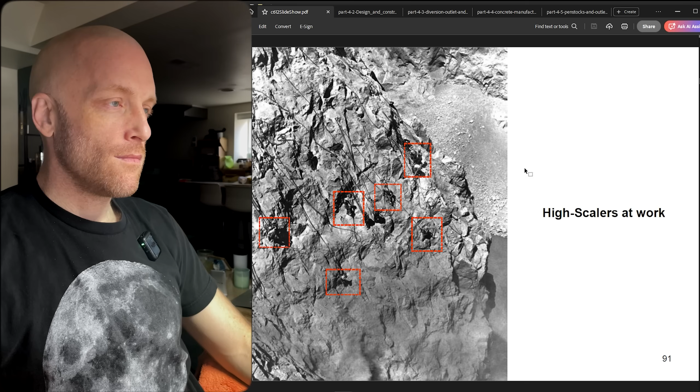Oh man, that's awesome. Look at these fellas just dangling off the side, the high scalers. The bosun's chair.

I hope that some of the enthusiasts would see that I cared about the accuracy enough to model a Mack, an early Mack truck. If I'm going to include a detail, I want to make sure that it has things that will please people that know.

It's not good enough to fool a bunch of people online who don't know anything, that's easy. If you can convince the experts who do know, then you've done your job. I love that feeling of having people who know something be delighted to say, oh man, he included this detail. Yeah, that feels awesome.

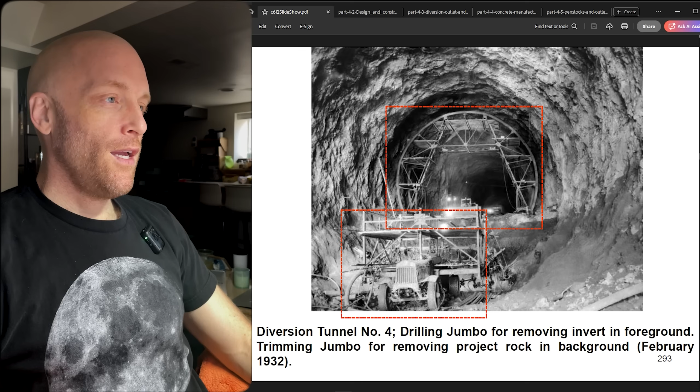Didn't show this one, but this little arch - you can't see it in this photo, but there's an arch behind here. That's from removing the invert section, the construction road in the tunnel. And this jumbo here is just for trimming the walls to make them round, so they would stand up there and jackhammer and whatnot. The invert forms.

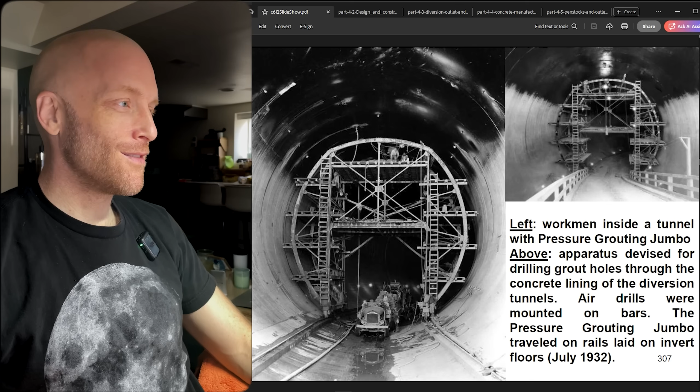This I did not show - the pressure grouting jumbo. I showed the grouting right in the tunnel, but not the pressure grouting rig. Just as involved as the other rigs. There you go, the pressure grouting rig again.

And they made the penstocks and all the other tunnels in similar ways. They're just as involved - look at all this gear and equipment and all the people in here. So much detail, but yeah, they followed a similar process. So everything looks like that. Just insane - you can't even imagine everything that's happening in that moment.

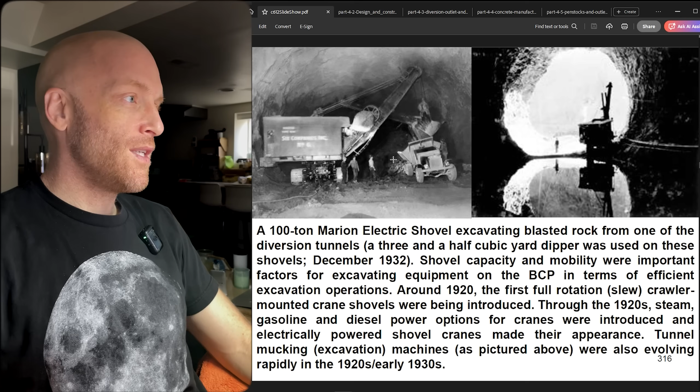Diversion tunnel openings. There's the photo inspiration, the 100-ton shovel and the truck. They could barely fit it in the tunnel, so they had to really think about that. And trucks going by each other was a problem, so it was a tight fit for all this equipment in the tunnels.

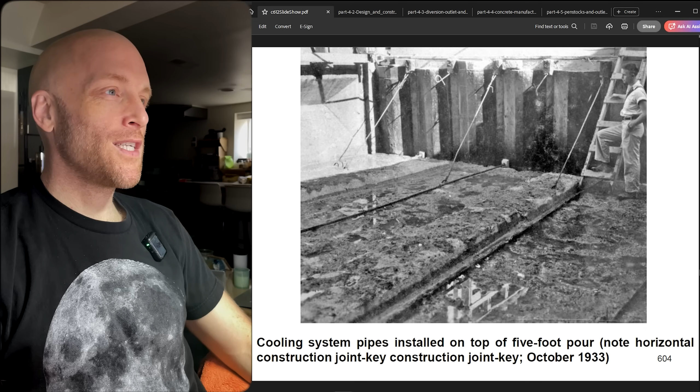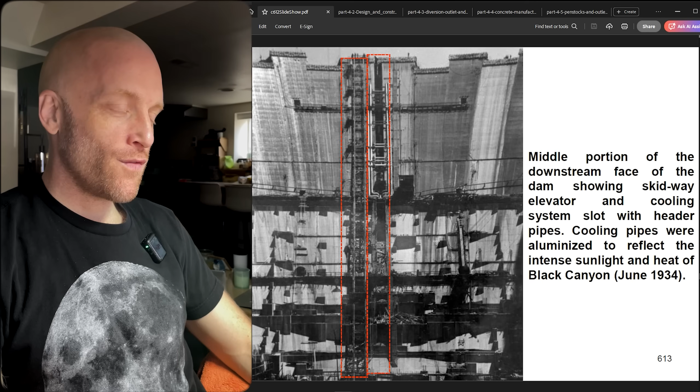There's lifts that go up and down the dam and scaffolding for different things they're doing. These little brackets here are the foundations for the administration building. I didn't show those foundations, but I think I did build them though.

Once they got up high enough on the dam, they start doing things on the outside instead of the inside. So pressure grouting is the same way. You'd see platforms on the outside, way up high.

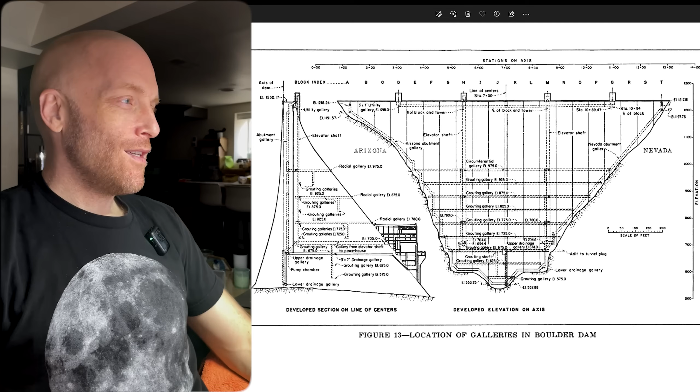Here's an image of the galleries. I didn't realize that this particular drawing is actually flattened, not in the actual arch shape that it would be in. So I was confused when I first put this in my 3D file. It's been flattened, so I had to kind of guess a little bit where these galleries go. But the side image is useful.

So there's all the internal galleries. Well, there's more than this, but this is what I used. This is awesome, so it shows the canyon walls and the altitude lines, and then the abutment excavation. Yeah, this is so neat. It allowed me to reconstruct the actual cutout at those elevation lines.

Look at that, it lines up perfectly. So I load this in and then draw my excavation from there, down the canyon walls. That's what becomes that part in the video.

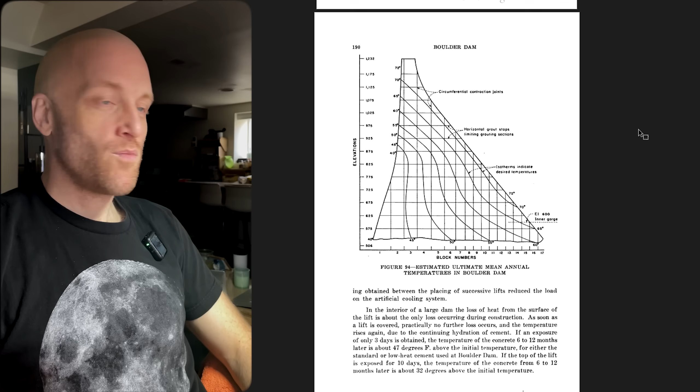Detailed graphs of temperatures, yeah, where they're at in the dam and all this. They have so much of this kind of material. It seems like a computer render, right? There's pages and pages of this kind of stuff.

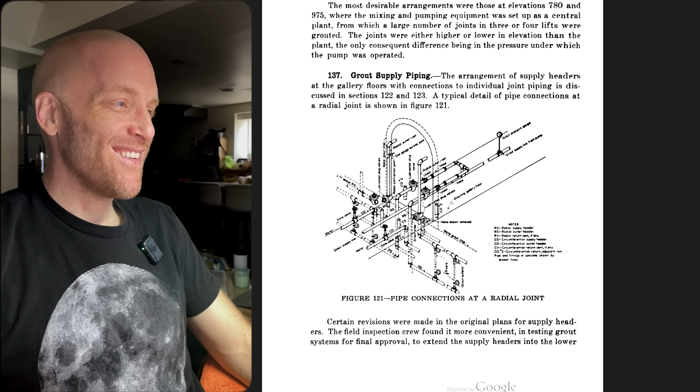Here's the grouting pipes into the galleries. I wasn't gonna model that. Look how detailed, just in that one part. Yeah, like detailed graphs of deflection when they grouted, how far the blocks moved.

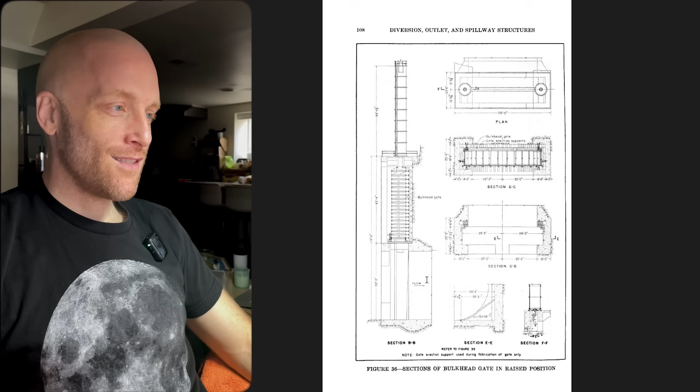Here's an image of a blueprint showing how those huge gates work at the tunnels. Hauling the pieces over, it's so big.

They had a trash rack on that Nevada tunnel number 4 that was used, the final tunnel that was closed. They had a trash rack on it because of those sensitive gates and whatnot in the tunnel plug that I showed in the video. So that's interesting, right? That they were using that last tunnel in a different way than the other 3.

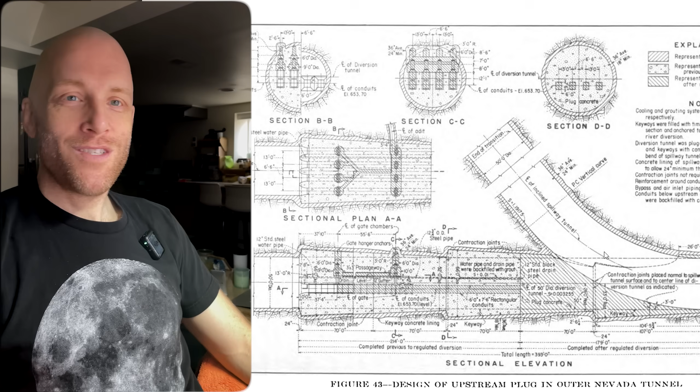Here we go, so there's the internal gates for controlling the water flow inside of the tunnel plug. And the elbow transition where, like I said, this had to be mathematically perfect, and when it wasn't, that flood ruined this part right down here of the tunnel. So it's just amazing that something that big would have to be so precise.

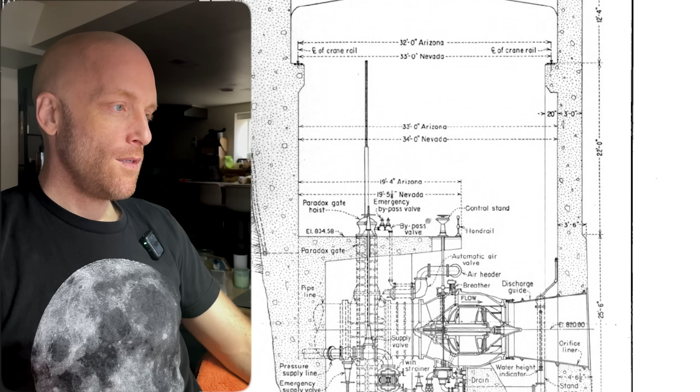They set them up in a laboratory and built what looks like plexiglass and acrylic models of this stuff. Here's an image, a side view of the needle. These needle valves that were replaced used the water pressure of the water going through it to actuate the valve.

I kind of wanted to go into it, but the video is already super long. They used the water in these internal passageways in the needle valve—water pressure going through these passageways to move the valve itself, which I thought was really clever.

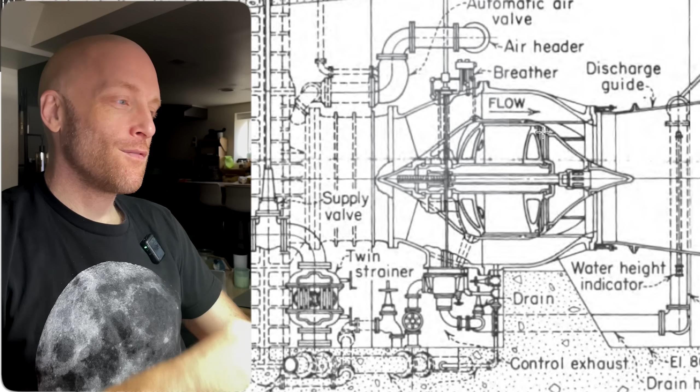Everything has been thought about, everything designed specifically to handle the requirements for the project. But when you're standing there, if you don't know this stuff, and I don't since I'm not an engineer, you don't think that every single inch of those spillways has been thought about and pre-planned. You just don't think that. It's amazing to learn.

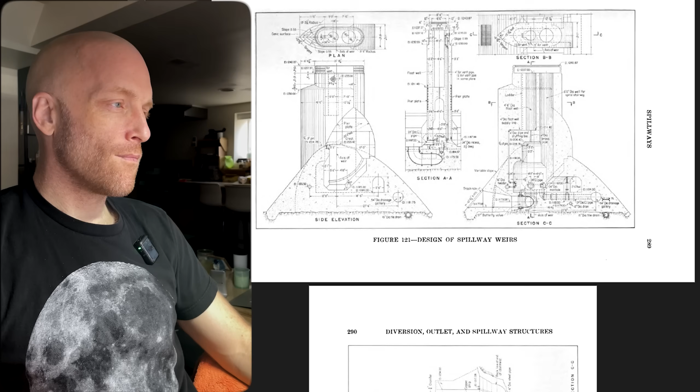Here we go—here's the drum chamber, a gallery, drainage. Here's the chamber for the inlets and the trash rack at the front of the spillway where the water comes in to fill that drum chamber.

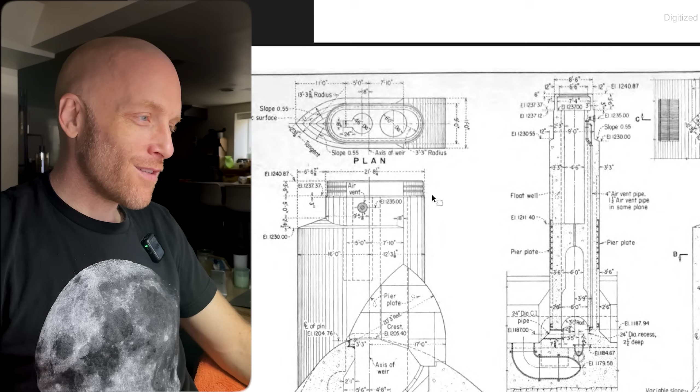So here's where I got all that info—the piers. There's so much cool stuff going on in here too, so many little passageways and places where people can go in to service it. Everything on this dam is so huge.

Right, so those are all some of the PDFs. I mean, I've got more—let's just have a look in my assets folder here.

High scaler, that's what I was looking for there—the coiled up rope. I wanted to get some of these knots pretty close or even correct if I could. I do get into that kind of detail with my ships. I'll make sure the knots are correct because I just like surprising people to know that I would care about that level of detail.

The level of detail I aspire to in these projects isn't necessarily a compulsion or a drive to perfectionism. I think a lot of artists, especially in the past—talented people with drive also had some pretty deep demons and gremlins in there. So I think it's important for me to understand where all this drive comes from, because I don't really like the way modern capitalism talks about drive and grinding. I don't think that's true. This comes from an appreciation for details, and my intent matters, I think, and that's why I want to do this.

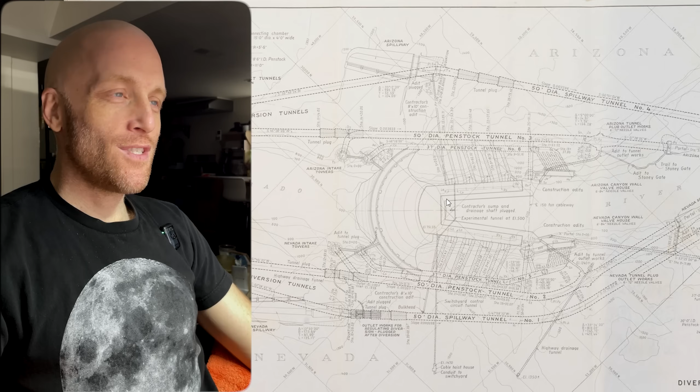So stuff like this is so important, where I have the whole plan, even though I'll need more, just to set up my file. So if I go into my 3D file here...

Let's see, my references. In the 3D file I have all of these folders and collections—they're called collections in Blender—to organize just my reference. So this is my file down here, all these, right? But the reference folder inside Blender is huge as well.

So if I turn this on and turn off that terrain model, there it is—that's the image you just saw. It looks like I have something else loaded up. Yeah, it's the side profile of the dam and the top, all of the elevations and the shape of the dam at those elevations so I could rebuild it.

To track these elevations in Blender, I built an altitude ruler so that no matter if I built an object, or could see or not see these reference images depending on what mode I'm in in Blender, I can still see the altitude in divisions of 5, it looks like.

From the base of the canyon at 500 or so, up to the crest of the dam and above for other things, so I built that into here. I believe I put the lat and long lines from that map into Blender.

One of the things that I really struggle with, that's difficult, is that these images might have been photographed with like a curved lens. Depending on the camera used, it might not be a scan, and even scanners can do this, but they'll be curved. The images are kind of curved. You might not think it's a big deal, but when you're talking about thousands of feet in an aerial view, when I get down into something like just this elevator shaft, you better believe that's a big deal. Just a minor curvature in the camera lens used to take this image can mean that it's no longer in the right place.

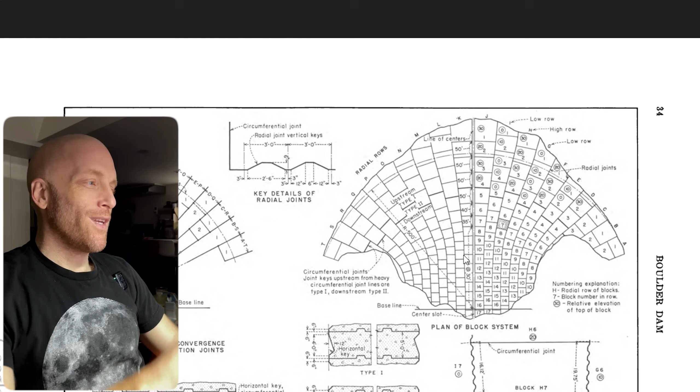Right, so these stagger high and low throughout the project, but I also wanted to have that building animation be kind of random in how they're placed, so that's an interesting requirement. As I go up, you can see that working. So what this is is an actual diagram from those reference images. They have all of these blocks numbered and in their lettered columns. Isn't that neat, like how that's planned out?

I built this object in Blender based on that diagram, and then I have this folder of blanks, so I'll build really simple versions of the shapes I need because I'll use them a lot in the project. I use this blank as a way to cut out these blocks — this is what they look like, just the diagram — and then I use that other little 3D object to cut these things, cut one out of the other. It's called a Boolean in Blender.

So as I roll up the timeline, you can see that it builds into that shape. In geometry nodes, this gets pretty wild. This tree got pretty wild because of all the requirements I had, but it's just doing the cutting operation, telling it to build one block at a time, keep this row higher than the other, and alternate like a checkerboard those blocks. There's a lot going on in that model — you wouldn't know that's happening just from watching the video, but geometry nodes is how I crafted that. It's all done programmatically, which is really cool.

This is a new thing they added to Blender. If I didn't have this, I'd have to do it by hand — shift these by hand and grow them — and it'd be a pretty intense animation. So, geometry nodes. I also used geometry nodes to make all the Booleans.